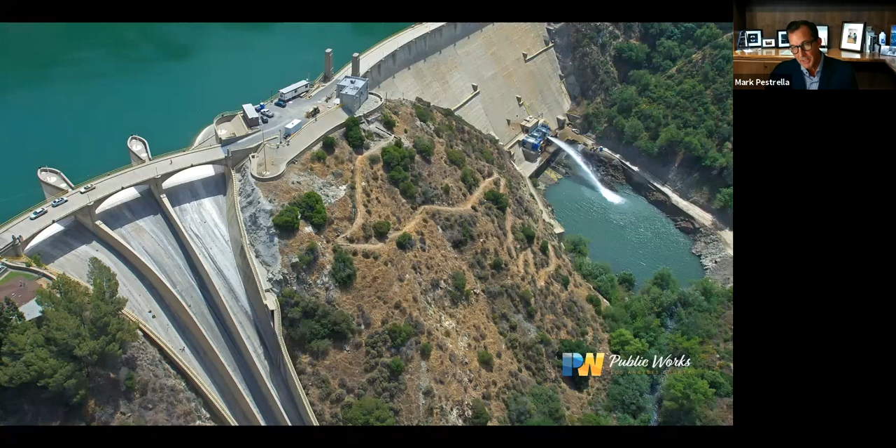What it also did, the consequence, as you can see, is it caused massive urbanization. It caused more flooding, actually, believe it or not, in the area, a sense of safety that's probably not totally real in the system. It also created disparity in communities, both dividing the community and excluding the community. Gentrification occurred.

As you can see, we pretty much paved over LA with the LA River when we built the system. It's an elegant system that moves water, but it doesn't do too good a job of actually capturing, cleaning, and saving water. That's what we seek to do in the future, is to create more opportunity to unpave LA, to provide equity in our system, and to create multi-benefit projects that better serve the needs of Los Angeles County.

So this has come about by listening to communities as we make major investments to optimize our system and create infrastructure that is ready for the 21st century. Our response to this is working collaboratively across those jurisdictions that I mentioned earlier and the 200 water retailers that exist in Los Angeles County.

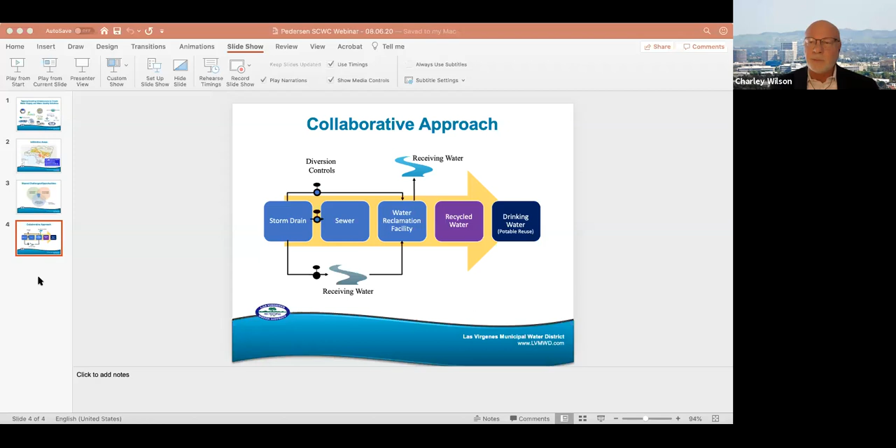The issue of stormwater is not new to us as a coalition. Part of that is we produce white papers or content, doing that analysis I talked about in the opening. What does stormwater mean? What really works? What doesn't work? Based on data and science. I know that this next iteration of our white paper is something you've really taken charge of and are leading, again as Mark just described, a coalition of entities really looking at stormwater. Describe for us what it is you've narrowed the focus on this year.

Thank you, Charlie. Good morning, everyone. Thanks for joining. Again, my name is Dave Pedersen. I'm the general manager of Las Virgenes Municipal Water District. For those of you who aren't familiar with our agency, we're a retail water and wastewater agency in the western portion of LA County. I also serve as the chair of the North Santa Monica Bay Watershed Area Steering Committee. So what that tells you is that I either have trouble saying no, or when the time came to say not it, I was not quick enough.

But all joking aside, we are an agency that really has looked at water in the way that Mark described, holistically, and really looking for opportunities for collaboration. I think that is the theme of this white paper.

What I'm planning to share with you, some of the outcomes of the white paper, you'll see is really an effort in looking at water from different perspectives and bringing together those different perspectives, those different roles and responsibilities, and leveraging them together to produce results. So the white paper title is shown: the paper involves tapping existing infrastructure to create water supply and water quality solutions. It is an effort to look at multi-benefit projects. When we talk about existing infrastructure, mostly what I'm referring to is our existing wastewater collection and treatment system. I'll talk a little bit more about that. I realize that's a long title, but we were trying to be descriptive of really what we're trying to accomplish, and it wasn't easy to do that without putting that title together in that way.

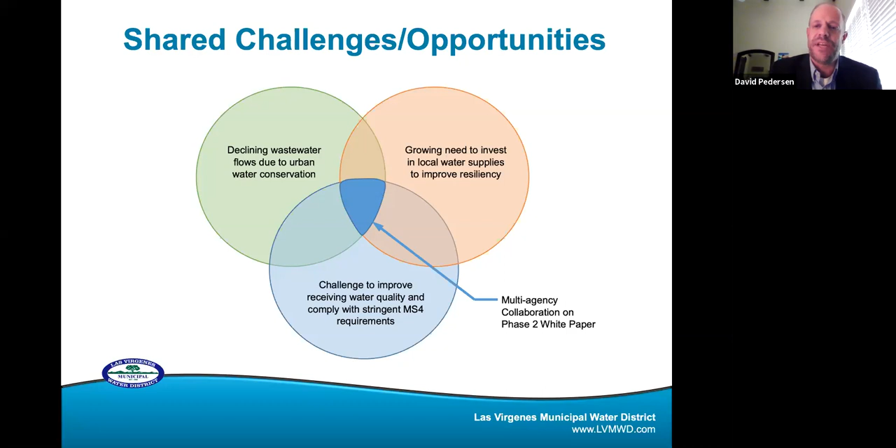So what I'm really talking about here, and I haven't explained really the strategy, is the alternate strategy of diversions. And what I'll explain is what we're talking about is permissive diversion.

So the diagram here shows the storm drain on the left. It shows a diversion of storm water from that drain system to a sanitary sewer, to the water reclamation facility, ultimately to produce additional water for recycling, and then through potable reuse to serve as a new source of drinking water. There's a couple different modes by which this can happen, whether directly from the storm drain to the sewer, or storm drain to water reclamation facility, or even receiving water directly to the reclamation facility. But in any case, the objective here is to create a new source of drinking water, while at the same time providing a water quality benefit in cleaning up either dry weather flows or first flush stormwater.

So the little valve symbols on the diagram are intended to indicate that what we're talking about here is permissive diversion. So it's a controlled diversion. It's very much different than a gravity uncontrolled system. And really that's recognizing that our downstream systems do have, in some cases, capacity limitations, and we need to be sure that we don't overwhelm those downstream systems.

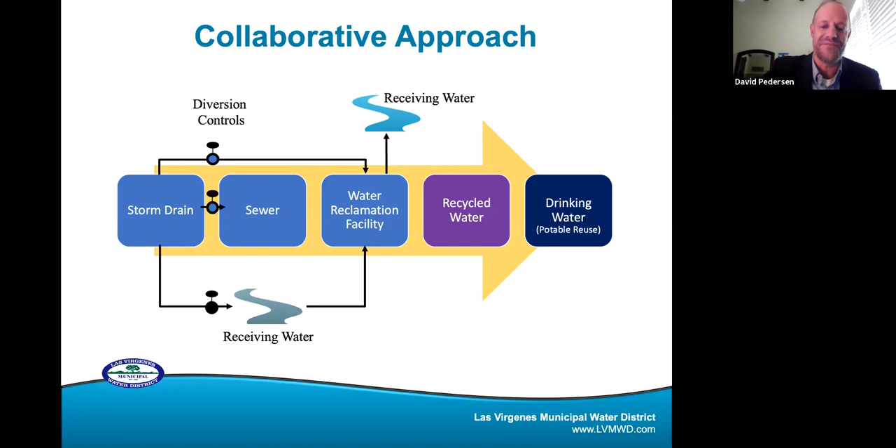And then last and most important, I think, is that using our existing infrastructure, which is existing and paid for by our ratepayers collectively, is the fastest and most cost-effective way to generate water quality and water supply benefits. Thank you, I'll turn it back to you, Charlie.

So thank you for that, David. I'm going to turn next to Enrique, and part of what we were teasing him a little bit earlier - I love the picture that is behind you because it really exemplifies the investment that has been made in the sanitation sewer process, and where Los Angeles is, and the operation that you have the privilege to run. But from your perspective, someone who runs sanitation, Enrique, how do you see the work that David is doing and where this white paper is headed?

Thank you, Charlie. First of all, let me thank you and thank my fellow panelists. It's an honor to be sharing the virtual stage with them. I want to particularly thank Dave Pedersen for bringing glamour, celebrity, and attention to the underground world of low flow diversions. In all seriousness, Dave, I do appreciate you bringing attention to this most important strategy in our quest for water quality objectives and local water supply augmentation.

And as much as I like this picture, almost as much as the picture on my background, Lynn, can you move on to the next slide? So we feel blessed in LA San to be an agency whose mission encompasses a wide spectrum of the environmental services world. We want to be known and call ourselves a zero wasted water agency.

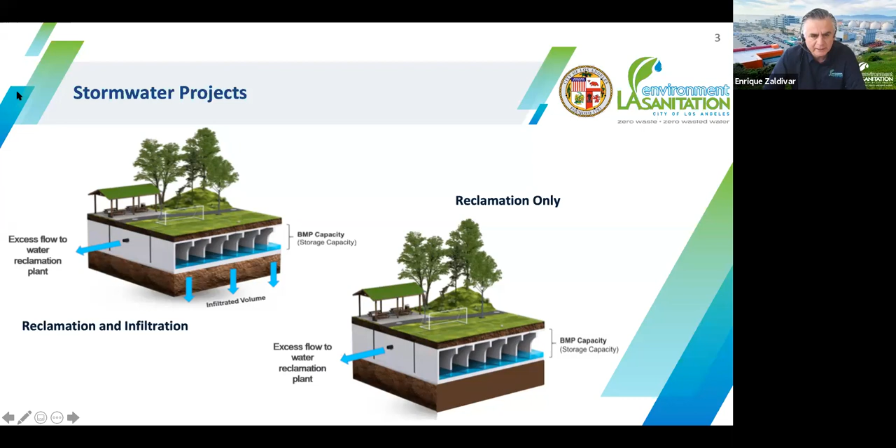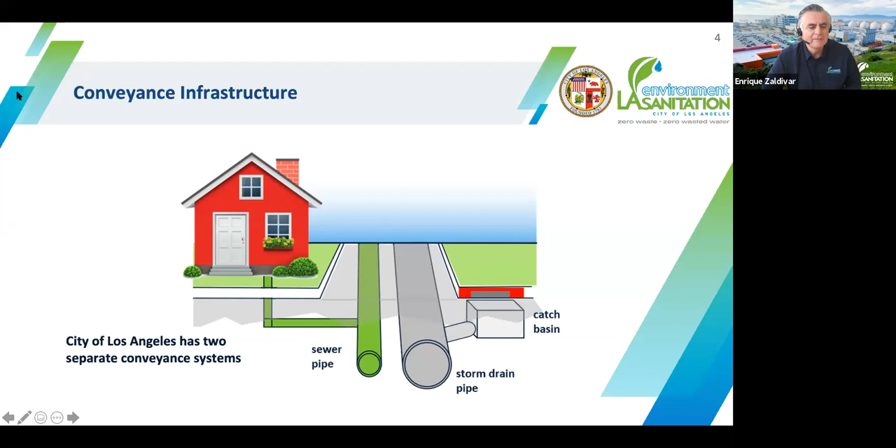Next slide, please. I always appreciate Mark's historical perspective on the LA River, where, as we look back to decisions our forebears made a decade ago, or I should say a century ago or even longer, we can now say well that might not have been the best strategy - but one that I am particularly appreciative of is when our forebears, in this case, brought two separate conveyance systems underground, one for storm drain and one for sewer, one for wastewater and one for stormwater. Most other countries, many of you would know, actually have a combined system. So being able to appreciate decisions made a century ago, unlike perhaps the LA River, this is one I'm always appreciative of, and this is what enables us to create opportunities such as what we're talking about today.

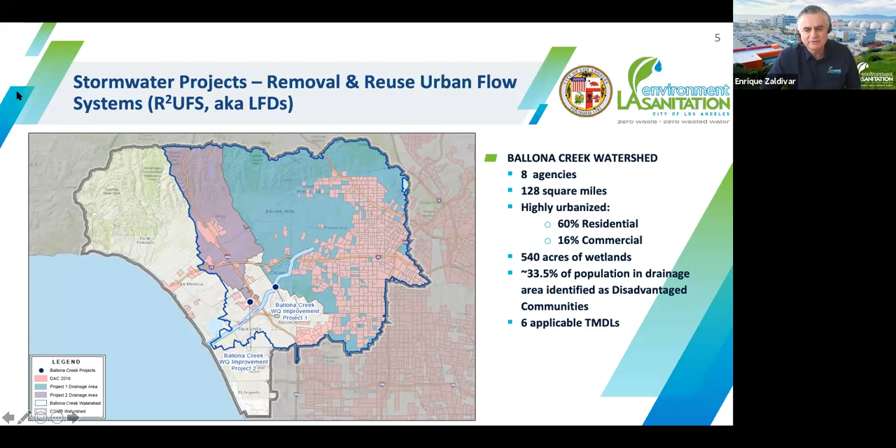However, for purposes of funding, as Charlie alluded to in introducing Mark, it's the Central Santa Monica watershed that is hugely important for us. In the end, I want the audience to know that we love them both. Our passion in the end is all about watershed protection, and both watersheds are very important to us.

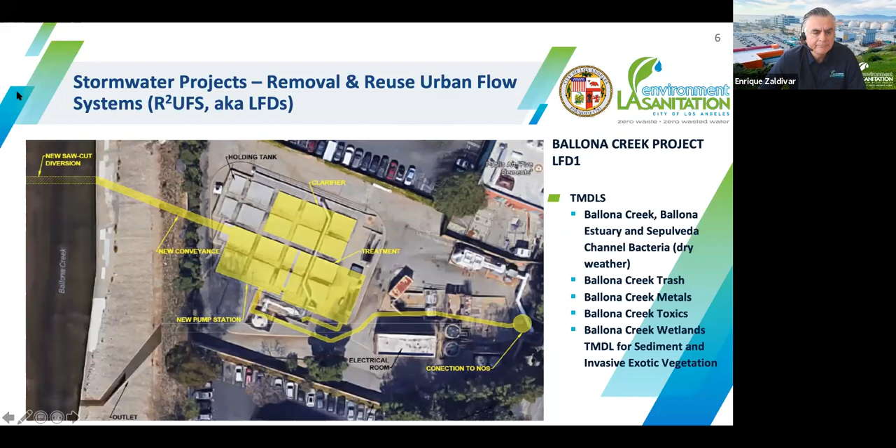Next slide, please. And this is somewhat the crux of the nexus of the wastewater and stormwater systems when it comes to augmenting local water supplies.

Hyperion, the facility in my background, is our most iconic facility of all of the four that we own. But here you will see the numbers that speak to the opportunity that Dave talked about - an opportunity of 184 MGD in available capacity for local water augmentation. The same is true in our other water reclamation facilities located all throughout the city, but depending on the topography and the hydrology, the opportunity may vary, whether it's fully achievable and can be fully realized.

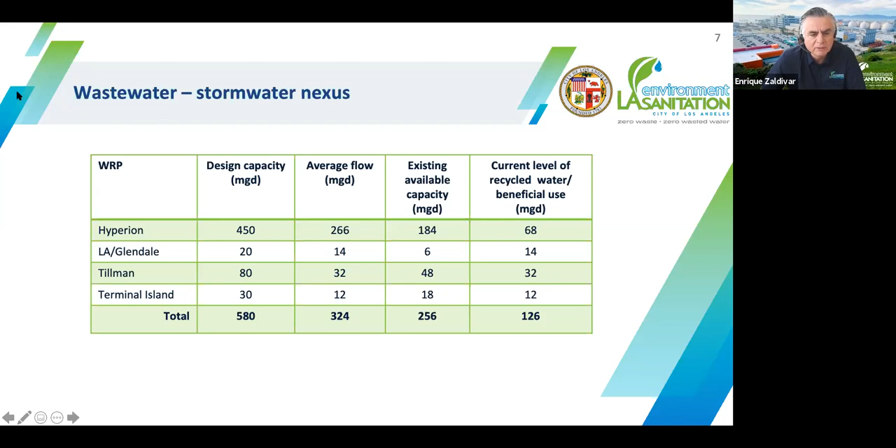Hyperion, if we can go to the next slide, is an exciting place for sure right now. Hyperion 2035 is part of Mayor Garcetti's Zero Wasted Water Initiative, in which our goal is to take all wastewater and recycle 100% of it by 2035.

Hyperion is no longer a dream, it's now an initiative. We have a timeline that we've committed to, the mayor has committed to, city council has committed to, whereby by 2035 we will have Hyperion completely transformed into a zero wasted water facility. We talked about partnerships with my colleagues on the panel, specifically in Hyperion's case. I want to thank our partners at LADWP and West Basin as we embark on this incredible 15-year journey, so I will still be able to see it completed in the rest of my career. Up to 170 MGD of new recycled water by 2035 - think of what that does to local water supplies.

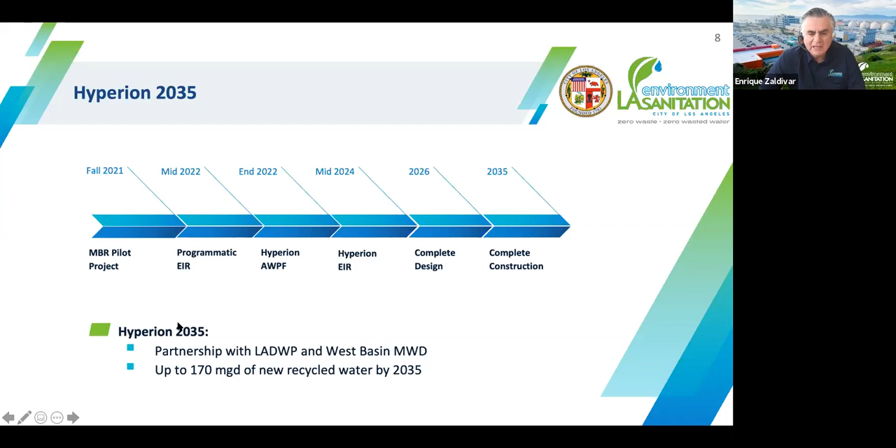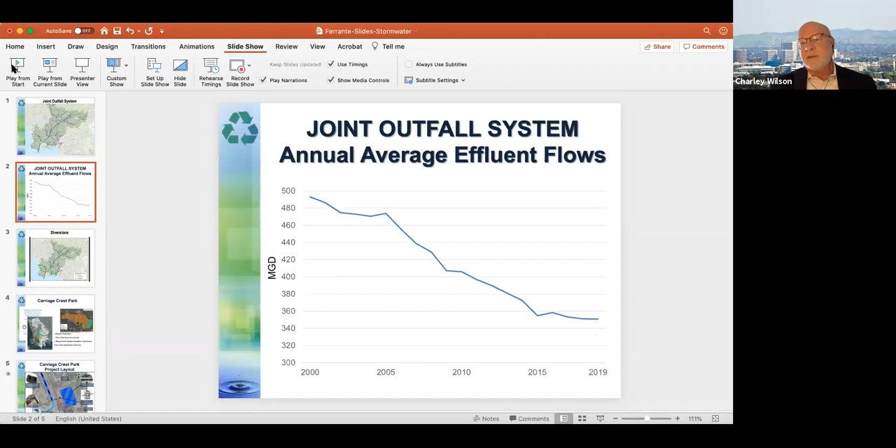So let us turn now, Robert - one of the great advantages of Los Angeles County is that it's really big and really diverse. One of the great challenges is, yeah, it's really big and really diverse. So from your perspective, running such a diverse area from a sanitation standpoint, what's your view on this white paper and what we're doing with stormwater?

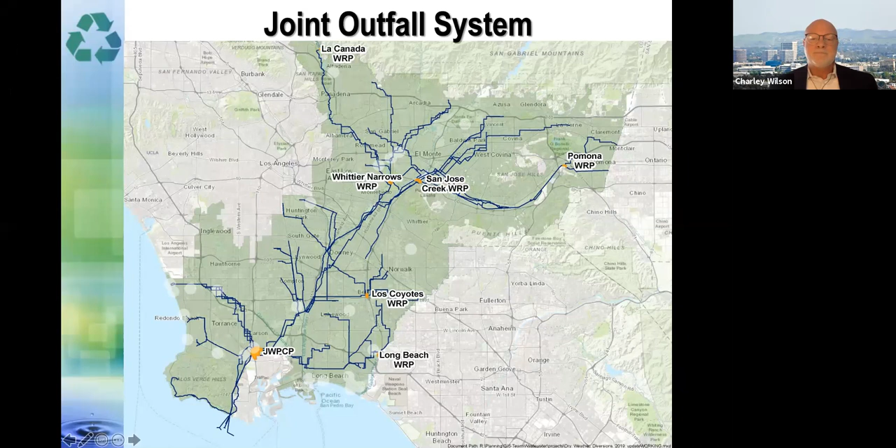Great, thank you Charlie, thanks for having me today. I'd also quickly like to thank my fellow panelists, especially Mark, whose leadership on Measure W is really allowing us to have these conversations and develop these projects. Dave, for his effort on the white paper, truly appreciated. And I'd like to thank Enrique for leaving me a few minutes so I can present with you as well.

Hopefully during my presentation, all of you participants will see some elements you can perhaps take advantage of when it comes to stormwater management - the types of projects we're doing and the opportunities and locations. Just a little bit about the districts before I get into the stormwater issue.

We have 10 water reclamation plants throughout the county. What you're seeing here is a picture of our main basin, or joint outfall system plants, and you can see all of our water reclamation plants dispersed throughout the county. All of those plants currently are essentially at 100% recycling, either primarily for groundwater recharge with public works and the water replenishment district, or for other purposes like irrigation and industrial use.

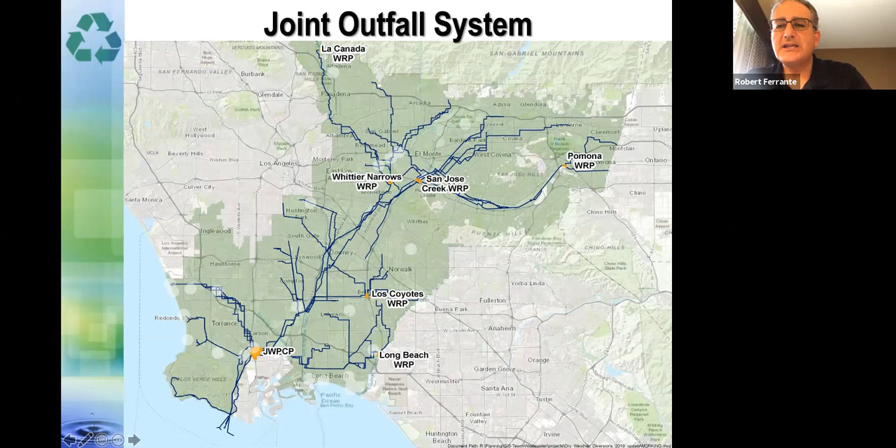If you move to the next slide, this illustrates what Dave was talking about with respect to the great water conservation that LA County has undergone in the last 20 years. You can see our flows to our treatment plants have significantly dropped, not only through the drought, but through a number of water measures cities have put in place - low flow toilets, low flow shower heads. A lot of restaurants and commercial entities have also reduced their flow. This clearly demonstrates the success of water conservation, but it also demonstrates the available capacity we have in our system to take in additional flows.

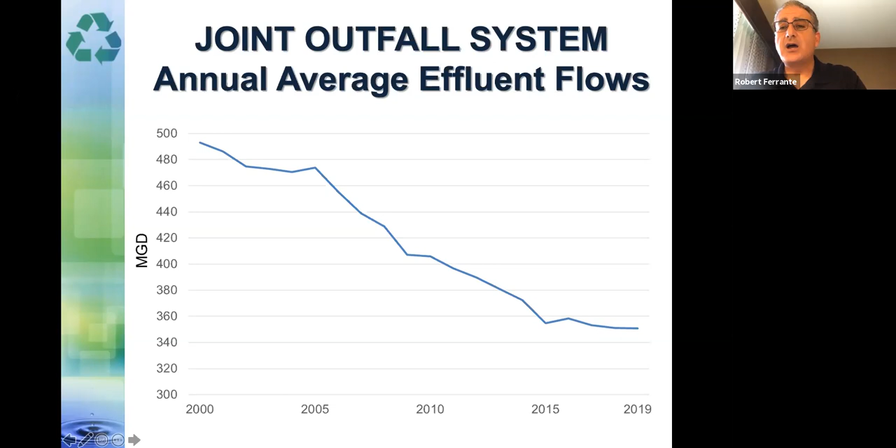To expand a little on what others have said, our system isn't just designed to take in dry weather capacity - we're designed to take in peak flows that occur during rainfall events, and we get infiltration from stormwater. If a road is partially flooded, that water will flow through manhole covers into our system, and we're already designed to take that increased flow in our sewer systems, as well as treating that flow through our treatment plants. So with respect to dry weather flows, we can take those, and I'll talk more about taking the first flush and flows throughout a storm. If you could move to the next slide.

Once the water is in our system, it's in a heavily regulated treatment system. Our treatment plants have their own NPDES permits with the regional board, and we have monitoring requirements at them. Once the water is in our system, from a stormwater compliance point of view, you don't need to worry about it because we have the tremendous treatment and monitoring infrastructure set up in our agency to ensure that the water is cleaned and safe for discharge and reuse.

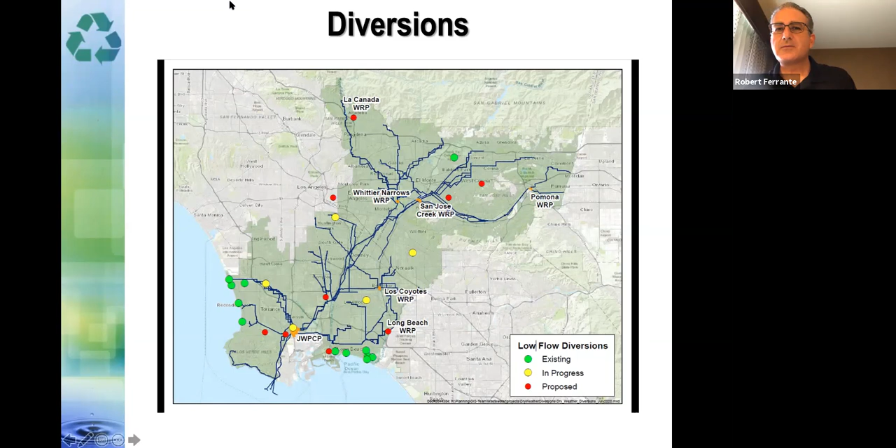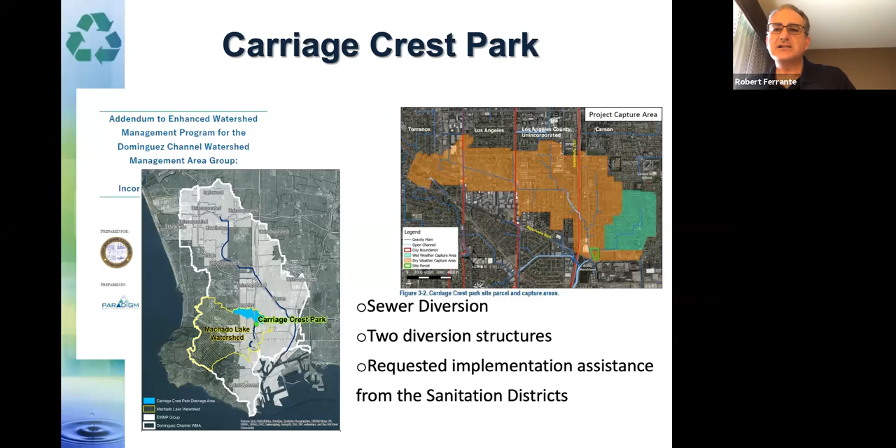The beauty of this project too is because we were so close to the plant, as Dave indicated on some previous slides, we not only can take the dry weather flow, we have a level gauge in the sewer system there. So as long as that sewer has capacity, we can continue to take water. We could take the first flush, and if it's a minor storm, we can continue to take water throughout the rainfall event if that sewer has the capacity. That is a big benefit of this project.

That is one thing that we're doing at various locations through the sewer system. We're investing in what you'd call smart levels, turning our sewer system into a smart sewer system so that we can better anticipate locations where we can take not only the dry weather flow, but the first flush or more of the storm water as well.

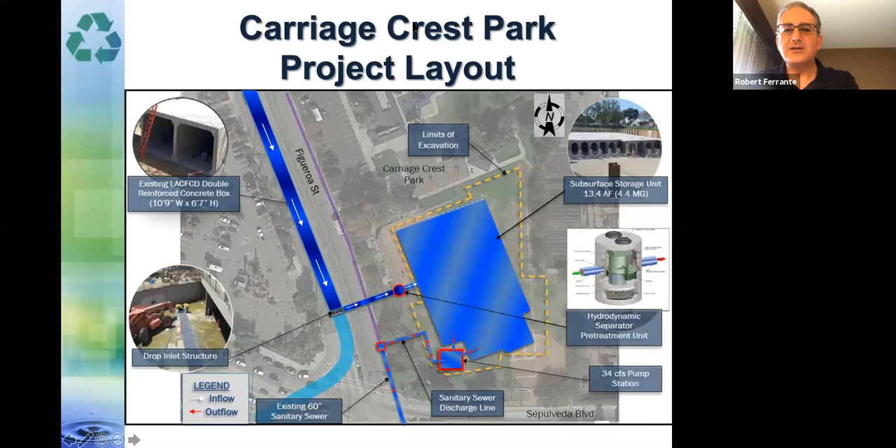So now that you've had a chance to hear the gentlemen talk, their perspectives, and on the white paper, let me throw up another poll just to get a feel for how you see things in the audience. Take a quick moment and answer: what do you think are the most serious challenges in stormwater?

Love to see the lines jump back and forth. Again, it's a little bit like a heart monitor, making sure we know our audience has a pulse. You guys are there, being fully engaged.